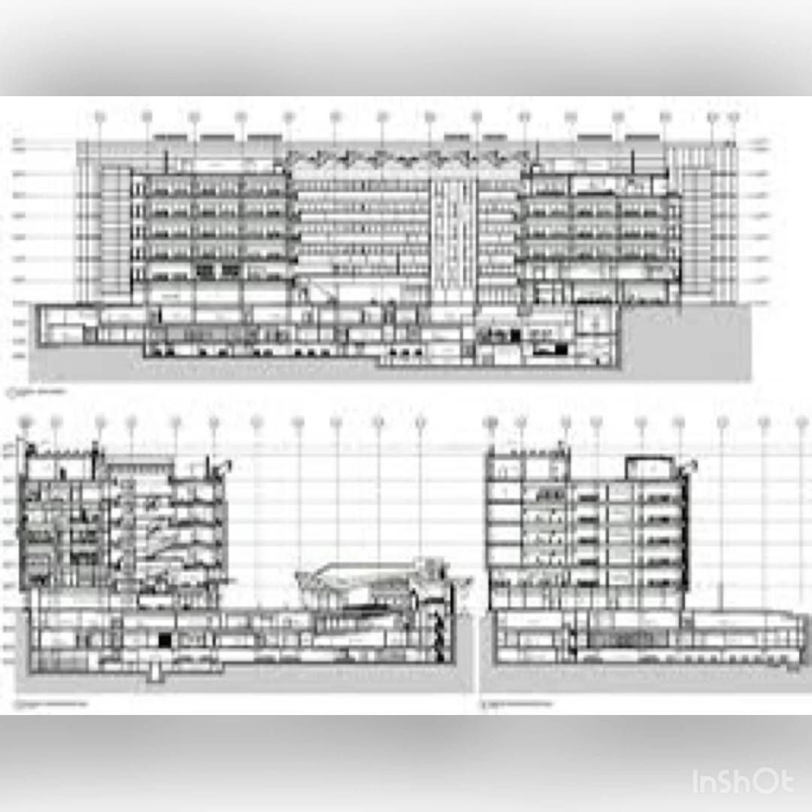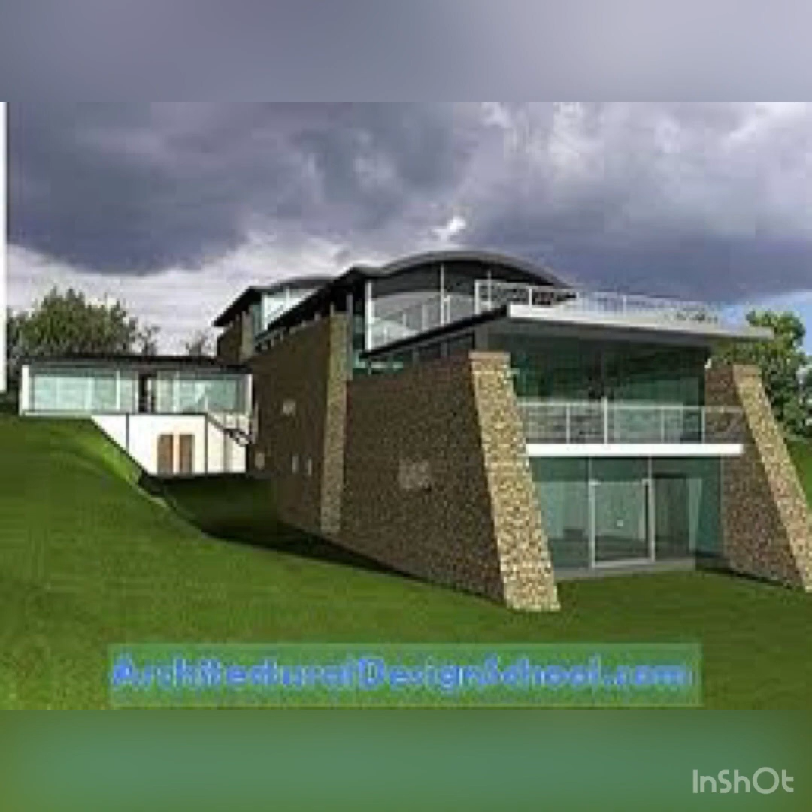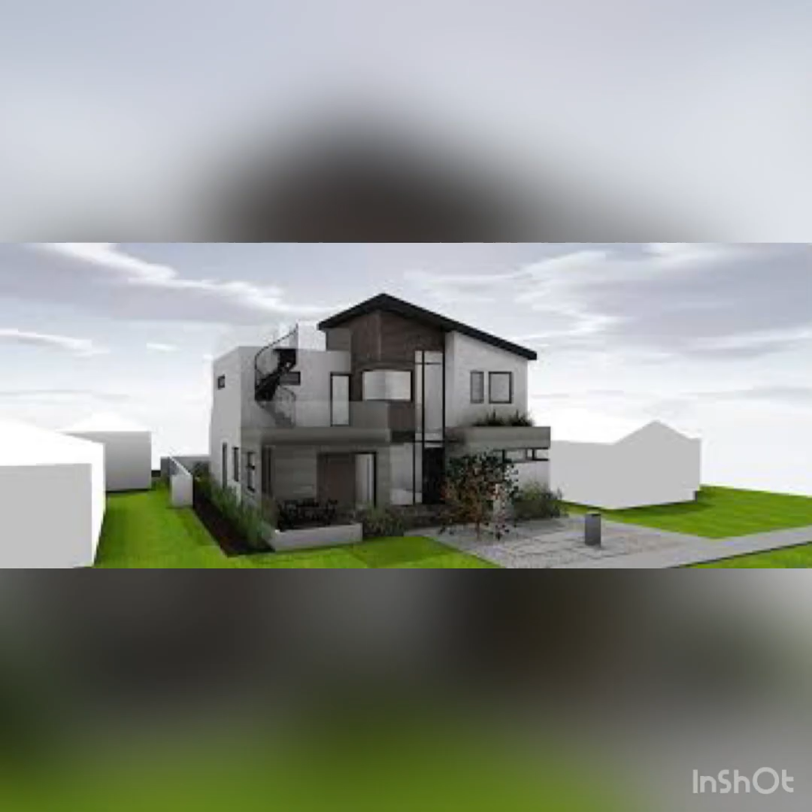The number of hours necessary for the production of drawings has decreased steadily over time, following the general trend of non-agricultural work in the United States since 1964.

Widening the length of the database contributed to the breakdown of architecture into its constituent components, requiring a literal taxonomy of the constituent parts of a building. This program uses a graphical user interface, perspective and orthography widgets, and a sortable database that allows the user to retrieve information categorically by attributes, including material type and supplier.

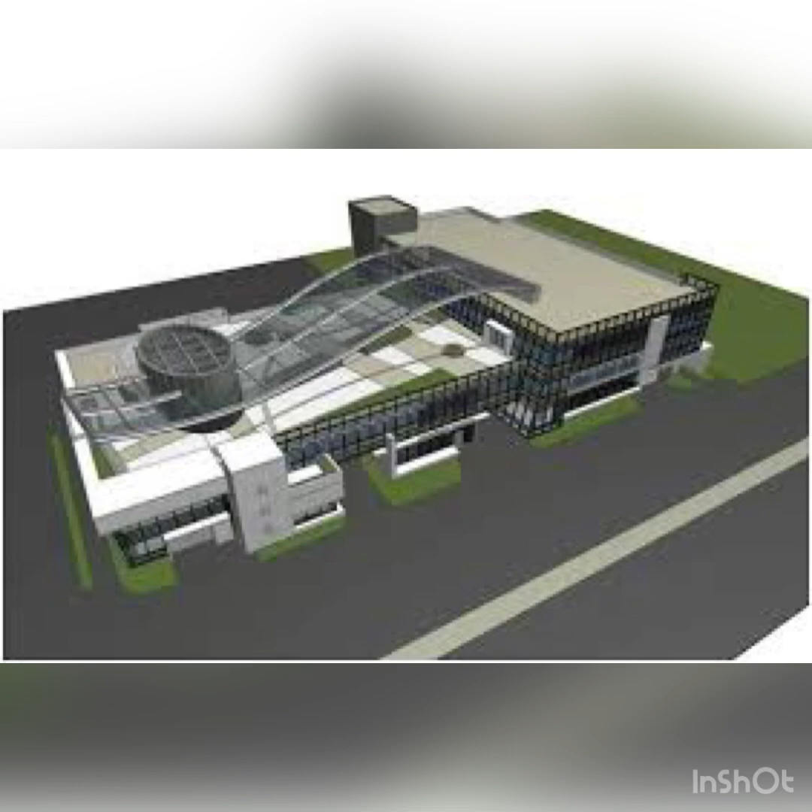But BIM is not a design or visualization tool, it is a process that allows the creation of a shared data model. This model is available to all interested parties, from designers, students, and ordinary people.

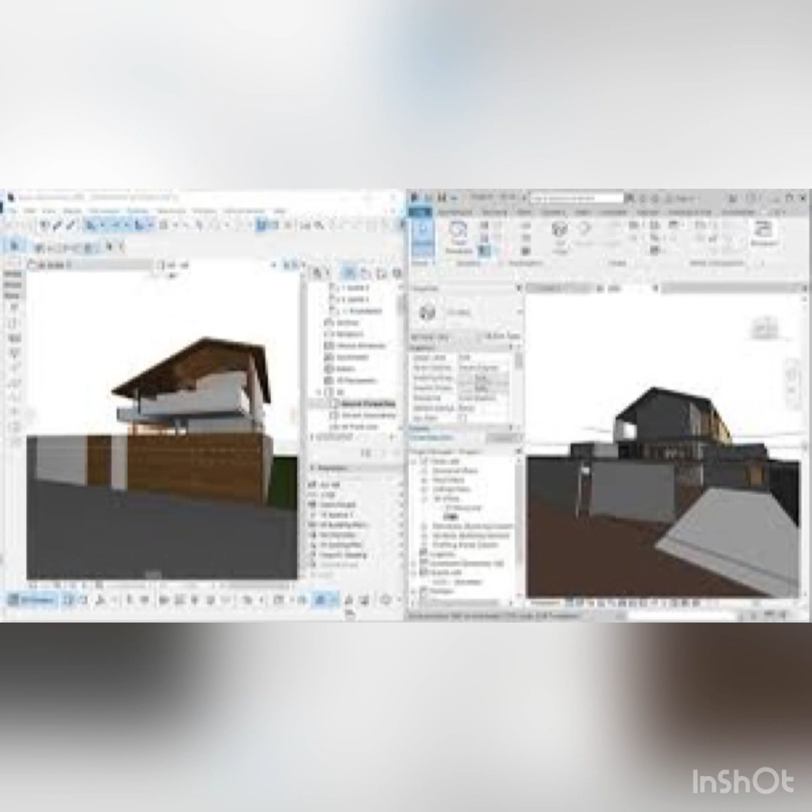In the early 1980s... several systems were developed in England and gained ground and were applied to construction projects. These include GDS, EdCAAD, Cedar, RUCAPS, Sonata, and Reflex.

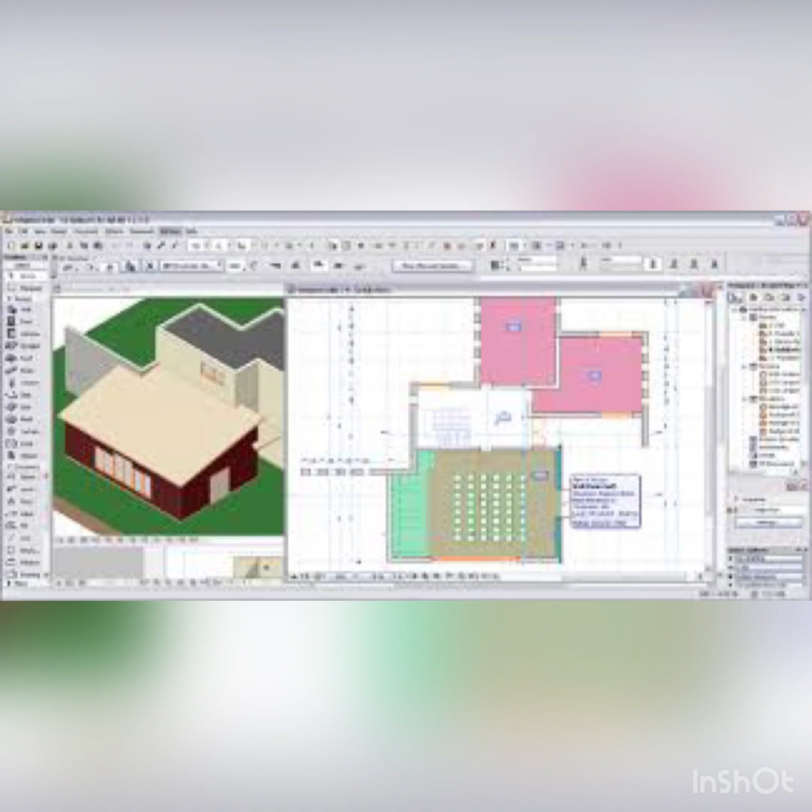The RUCAPS software system, developed by GMW Computers in 1986, was the first program to use the concept of time-phased construction process, and was used to assist in the phased construction of Terminal 3 at Heathrow Airport.

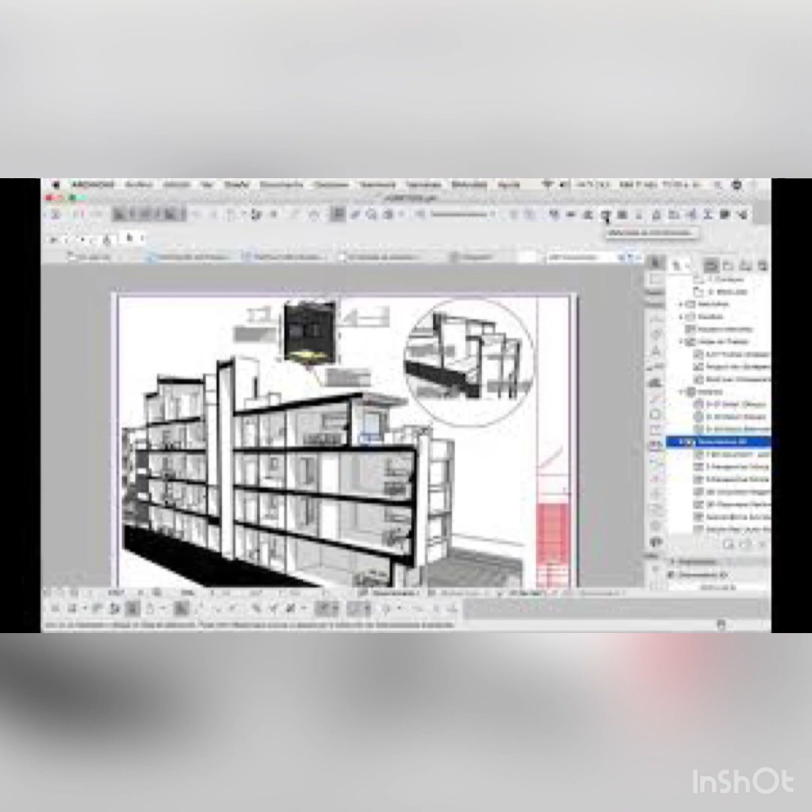This marks an important point where two trends in the development of BIM technology divide and develop over the next two decades. On the one hand, the development of specialist tools for multiple disciplines at the service of the construction industry and improving construction efficiency.

On the other hand, there is the treatment of the BIM model as a prototype that could be tested and simulated according to performance criteria.

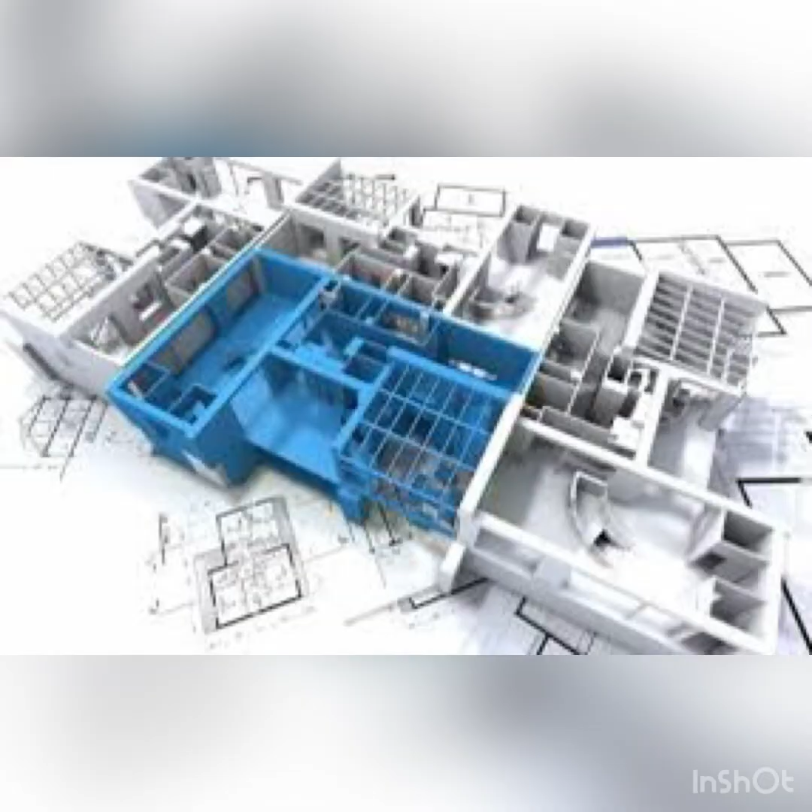The software was slow to start, as ArchiCAD had to contend with a host of design and hardware limitations of personal computer software. So ArchiCAD was not used on large-scale projects until much later.

ArchiCAD made substantial gains in user base between 2007 and 2011, primarily as a tool for developing residential and small commercial projects in Europe.

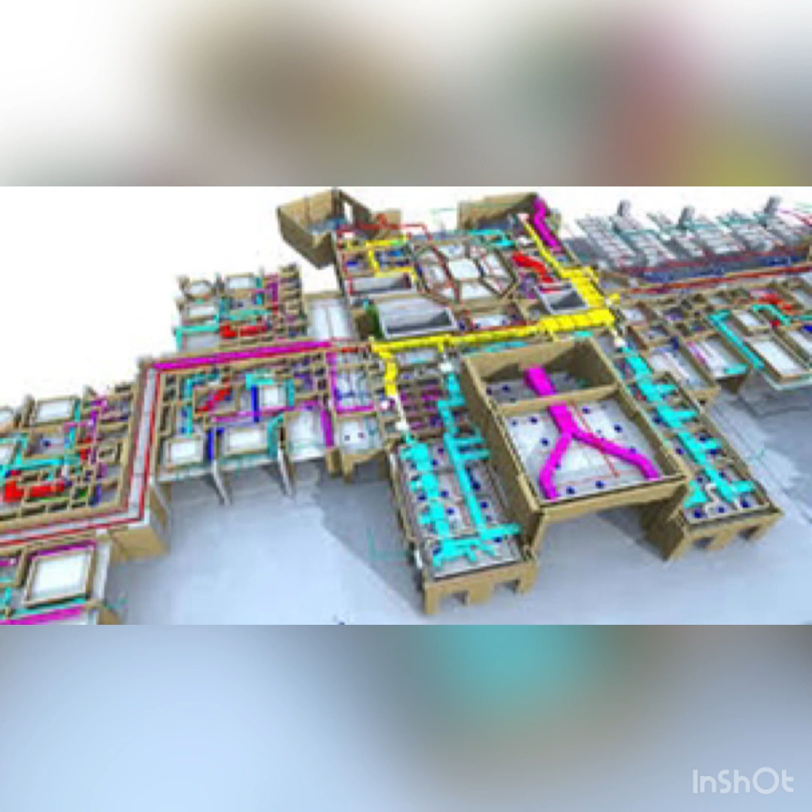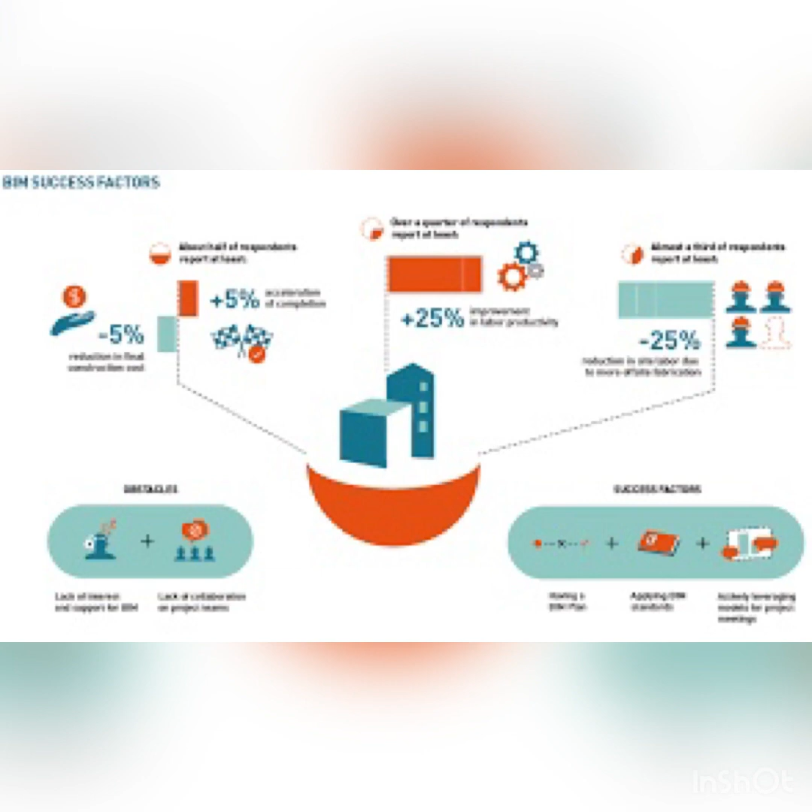ArchiCAD made substantial gains in user base between 2007 and 2011, primarily as a tool for developing residential and small commercial projects in Europe.

Recent improvements have made ArchiCAD a major player in the market, addressing fundamental issues like the lack of a phase component and a complex programming environment.

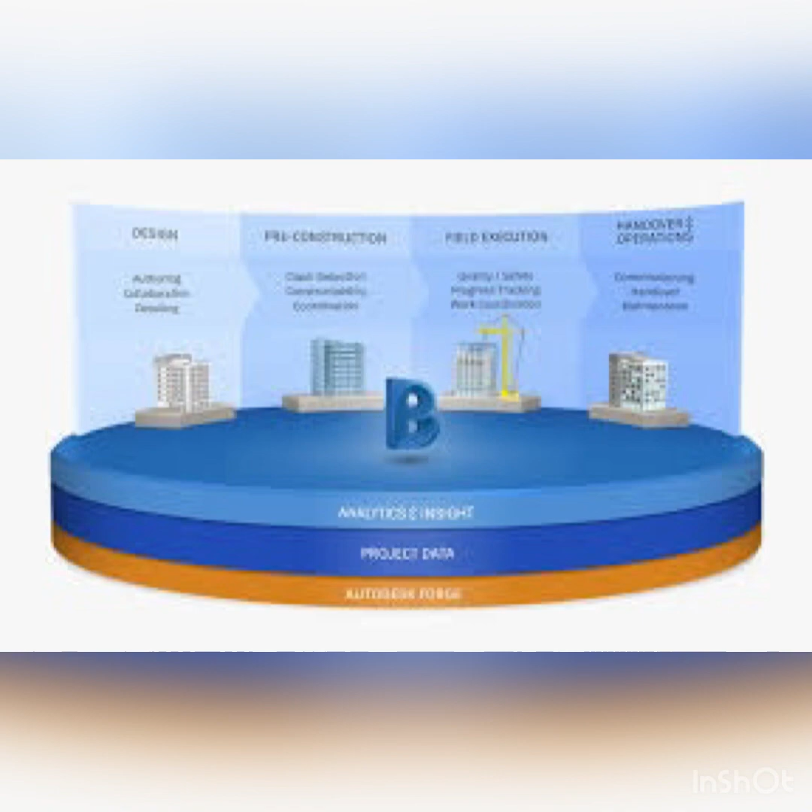The two wanted to create an architectural version of the software that could handle more complex projects than ArchiCAD. They hired David Conant as their first employee, who was a trainer at Softdesk, and he designed the initial interface that lasted for nine versions.

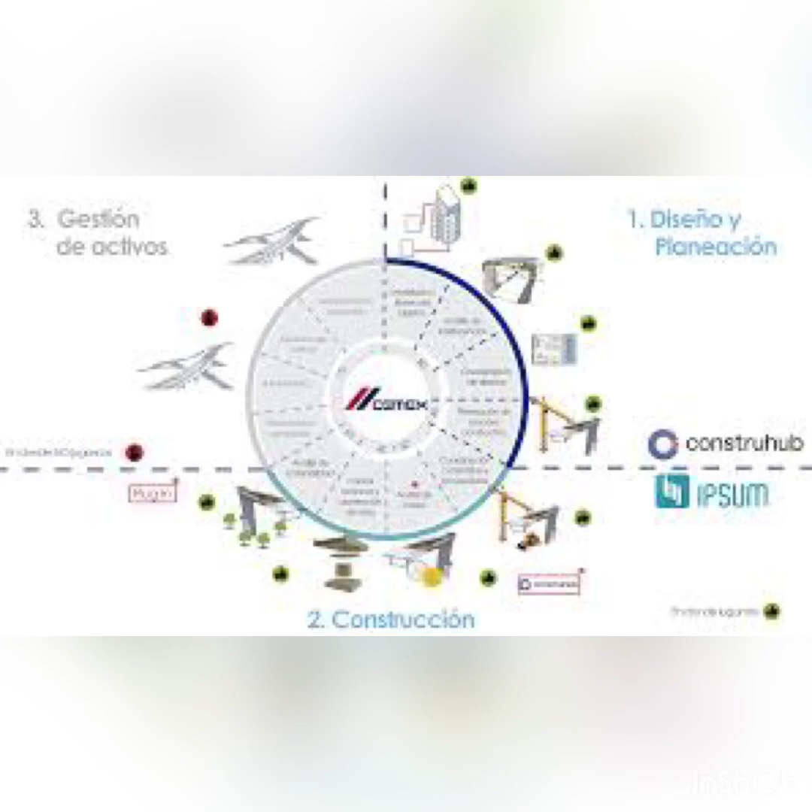Revit revolutionized the world of building information modeling by creating a platform that uses a visual programming environment to create parametric families, and allows a time attribute to be added to a component, allowing a fourth dimension of time to be associated with the building.

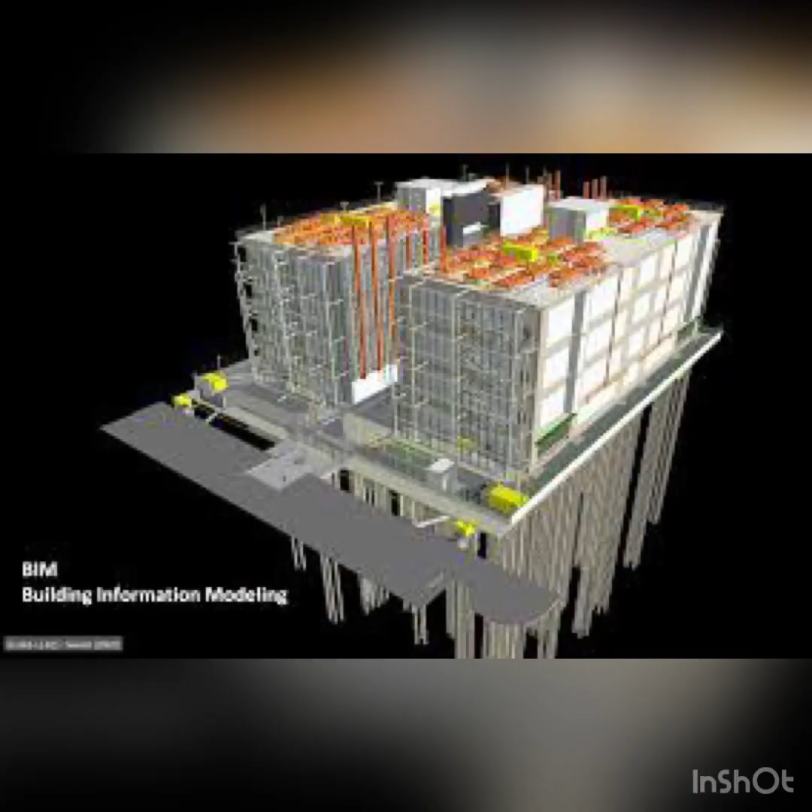This allows generating construction schedules based on the BIM models and simulating the construction process, with separate but linked models connected to programs that provide estimates of costs and quantities of materials in real time.